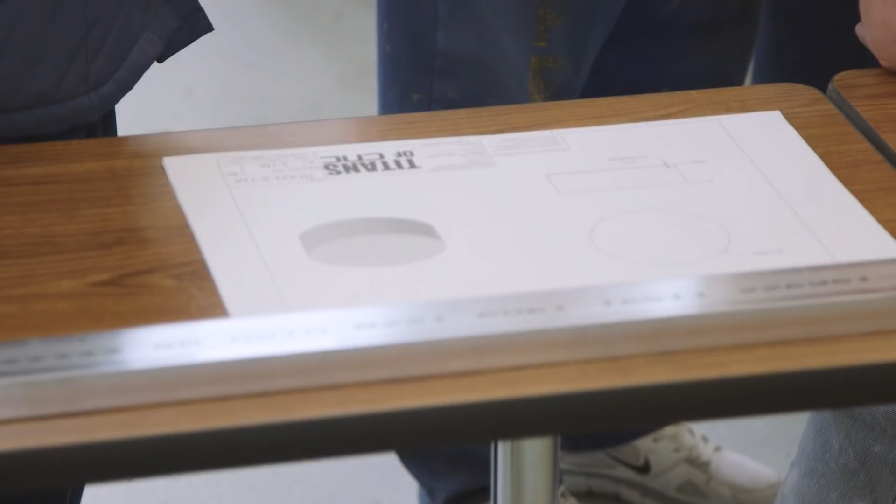When I think about training you guys and manufacturing, I want to make you valuable. This is the first series, it's 10 parts, and it's all online for free. It's a mill series where we have 10 different parts. We start off with a simple shape, a nice rectangle, and as you go through the 10 parts, each one gets a little bit more complicated. We use the same basic tools and keep adding just a little bit more, until you reach the 10th and final part, which is an actual aerospace part, just like the parts we machine in my facility every day.

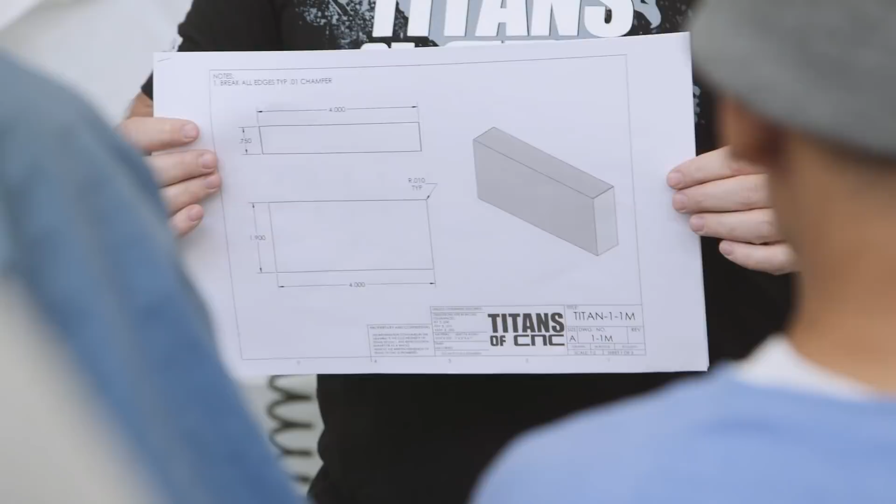We're calling these building blocks. On the video, I actually teach you exactly what to do. All you have to do is listen to me and do what I tell you in the video, and you will make this part. I noticed a lot of teachers were only doing a few projects, and I believe nobody can become an expert just doing something a few times. It has to be repetitive.

It's just a rectangle, it's not too intimidating, right? Once you learn how to do this rectangle, then this rectangle with some chamfers on the corners is just a little bit more, but there's a progression.

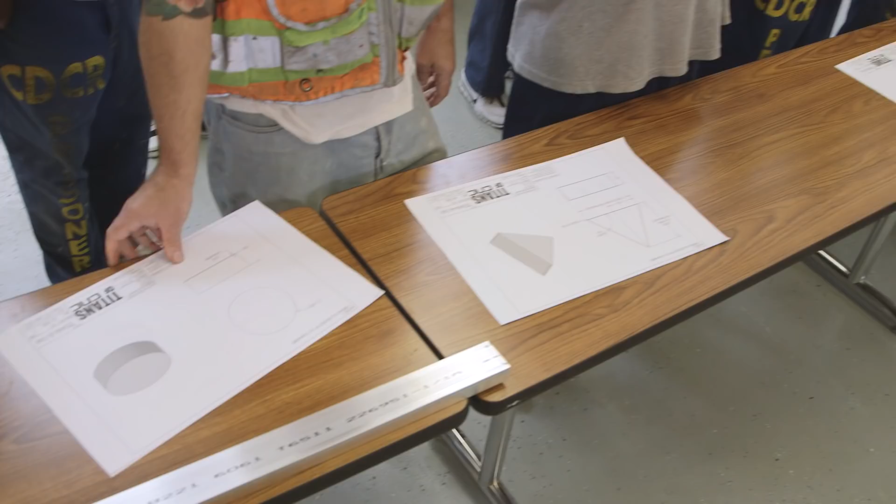What we have to understand is a lot of teachers got funding and got a machine, but didn't have the money and resources to actually buy material and the right tools. So material would be donated and they'd try to build something around that, which is why they'd only have a few parts. Every single part here, all 10 parts, vary in complexity, but I've standardized the material. Every single part—triangle, circle, square, rectangle—can be made from this one bar right here. You buy one bar, you can make all the parts from one bar.

Now we have the foundation. Let's put some threads in it. You have instruction sheets with all the prints that come with it. We section the drawings out so you can see the different stages in the part, and I explain exactly how to drill those holes. Then we come over here and draw this pocket and this cutout.

One of the biggest problems in manufacturing education is we're taking kids, putting them on manual machines, and they're getting experience in a manual setting at a certain pace. We need to flip that on its head. Kids today aren't growing up with the same toys we did 20, 30, 40 years ago. They're taking in technology at incredible rates, and technology is at a huge level.

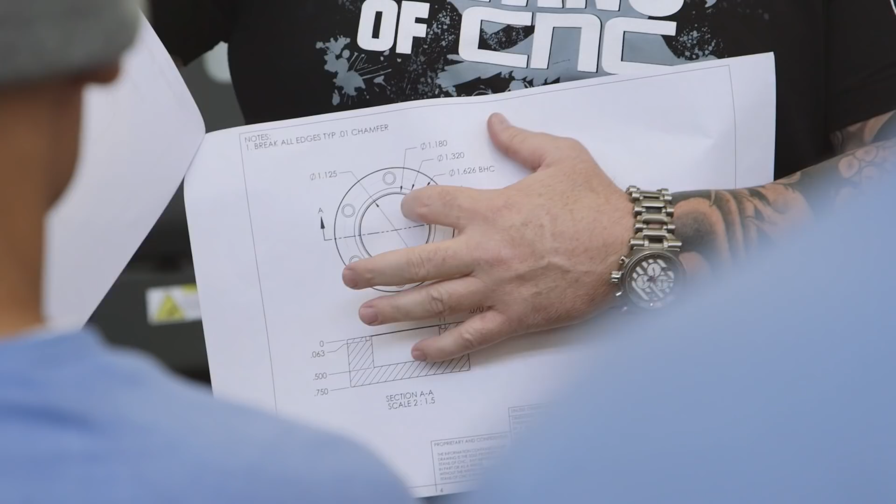I don't need the students to understand the whole industry. So my curriculum is going to teach these guys how to design their own parts on day one. Each one, as you go through, has a new challenge to it. On day two, we're going to teach them how to program that part. By the time you do part one and get to part 10, you'll know how to run these machines. Then on day three, we're going to CNC that part—not on a manual machine, but on a CNC machine.

All right, so we actually brought these computers and loaded the first teaching video, and we have the second teaching video where we actually programmed the part. So from this day on, you basically can start making parts. If I'm not here, the guys who know the most can kind of lead the other guys, and you guys can start working on your drawing and your different things, all right?

The first thing we're going to do is actually draw this part right here, okay? A lot of machinists don't get to learn how to draw parts, so what you guys are doing right now from day one is like upper level stuff, okay? So I'm going to play this up here, then you're going to understand the road that we're traveling on. You guys get me? Everybody understand? You good? Let's go, okay, go.

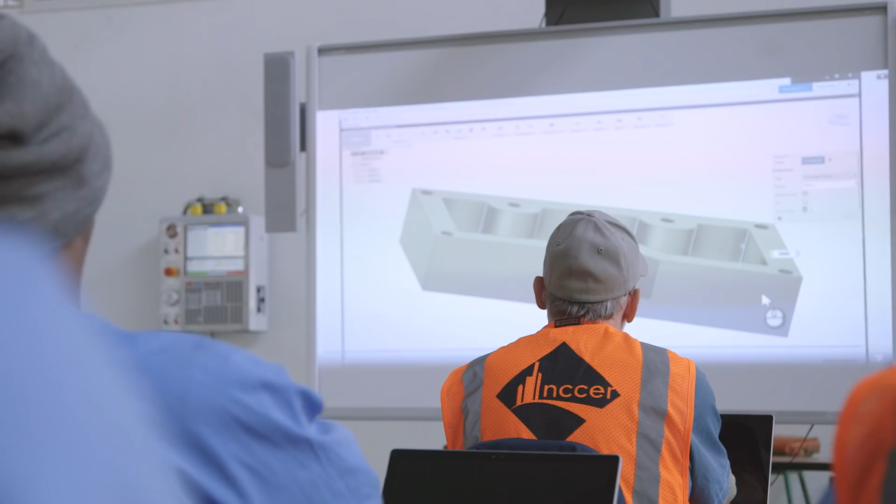Each of the guys have that video on their computers. They can open their computers, bring up Fusion, and follow the video step by step to learn how to draw. When I go back to my shop tomorrow and I'm working, they're going to be able to stay right here, learning off the video, getting better. I'm going to go to this one, go to this one, come down to this one, and flip it around just a little bit.

I'm going to place 0.195, enter, and there you go, guys. We have the solid model, the Titan-1-1M, and guess what time it is right now? It's programming time.

Boom! You guys kind of get it now? You saw it. Now you guys just have to go through the motions, right? But we're gonna draw the whole thing right out of the gate. I'm gonna have you guys working on drawing, and then you're just gonna go from the video to your CAD/CAM system, the Fusion. And if you don't know what I did, go back and watch it, and then just duplicate what I did. I'm gonna be working on the machine over here, getting ready to actually cut this part. So go ahead and start drawing.

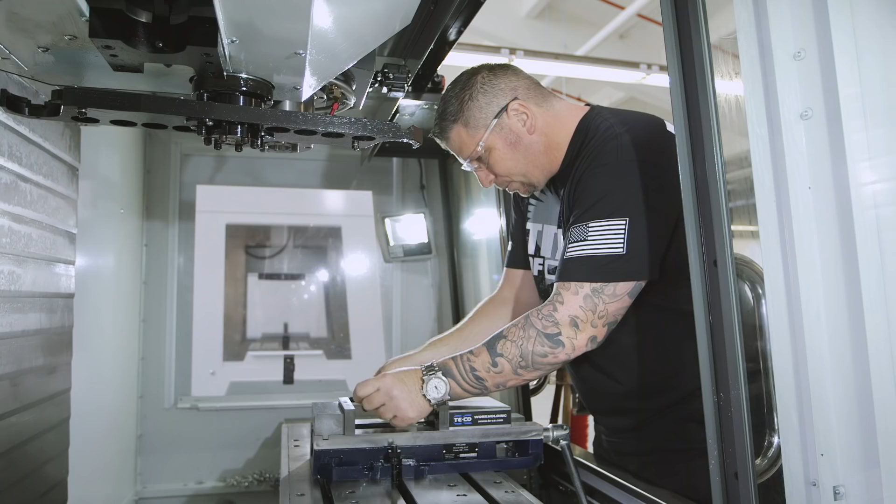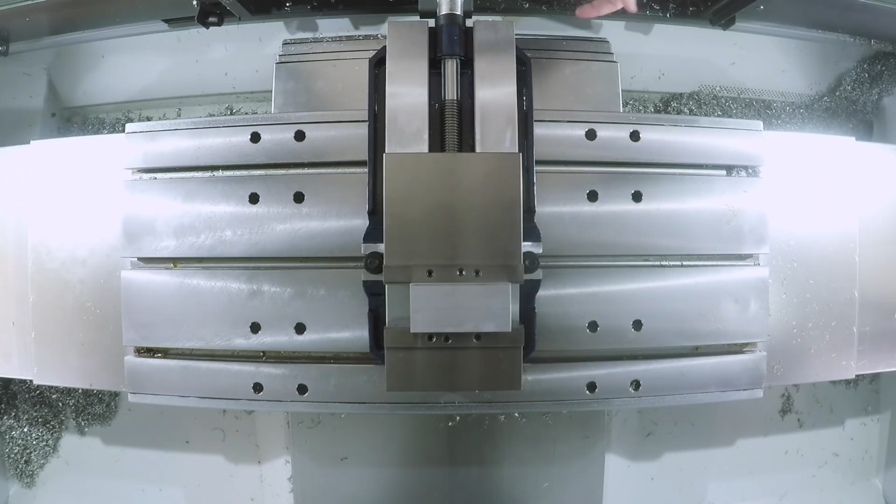Now that all the wiring is done, and I actually have one machine ready to go, I'm just going to show the guys how the machine runs. I made a program to machine the Titan-1-1M project from the Building Blocks series, just to show them how the machine works, show them the mechanics of the machine, so they can start wrapping their heads around it.

I was expecting a little more mathematical explanation, but the software does it all for us. You just click in radiuses and type in what you want and it's all there. I think this Fusion software is going to streamline everything.

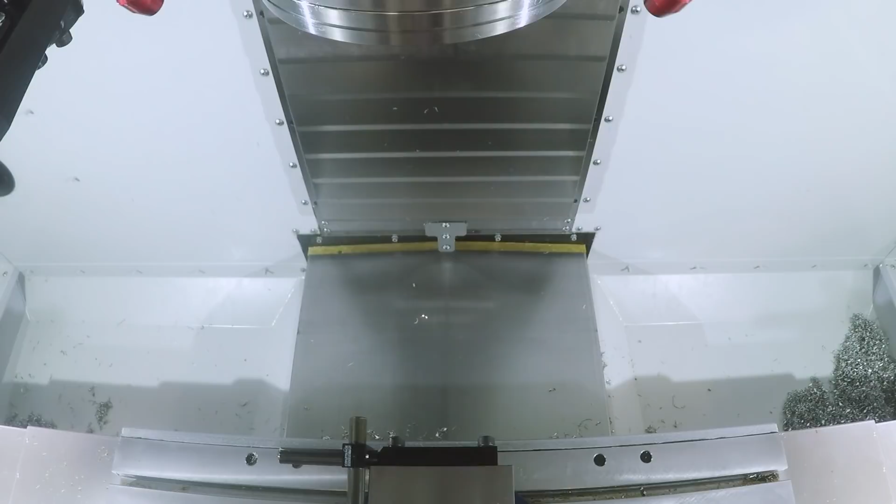The way he explained it on the video, it's super easy. It's a lot easier than having to go through a book and just guess, or listen to a teacher explain it in person, because there was no time wasted, so I think we could catch on fast. Really excited I'm going to make this part, it's cool, finally getting to the bread and the butter.

It's pretty easy to follow how things are highlighted. If you're doing like the depth of a hole, you can see a silhouette through the actual wall of the part. You actually know what you're clicking on.

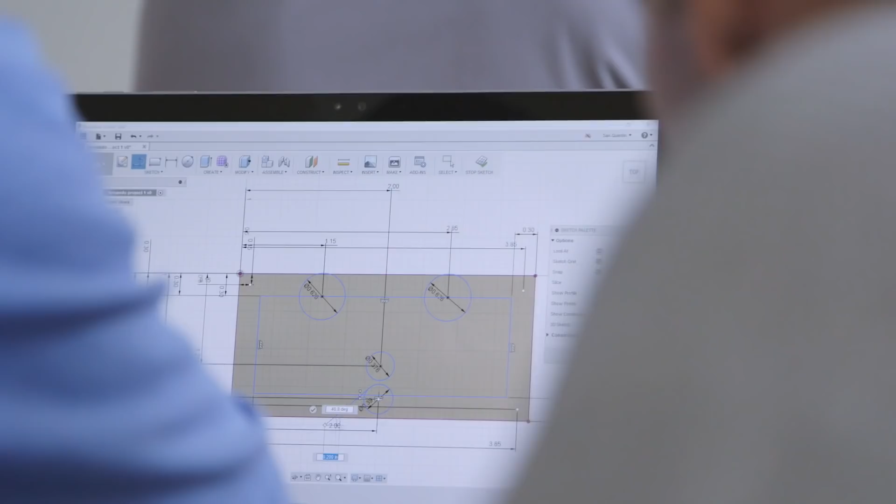First time sitting in front of a computer with some technology in it, it just blew my head out. I think it's pretty good, pretty good.

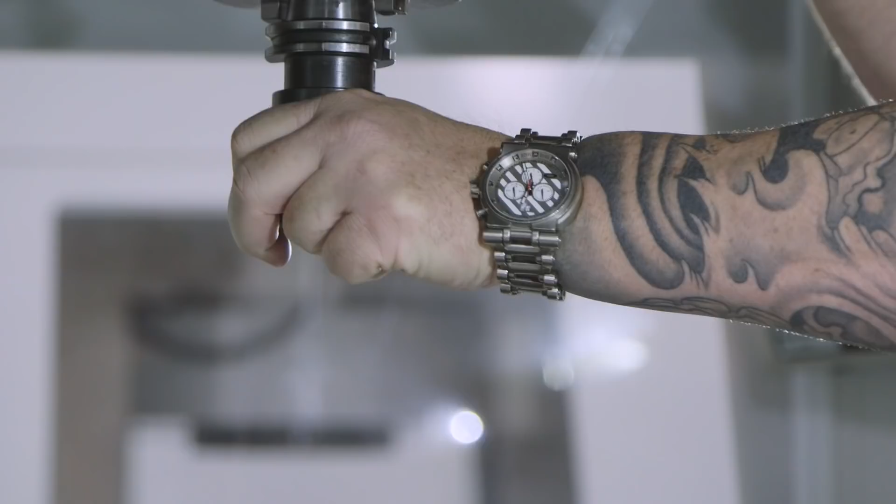It lets us know that we can get out and there's opportunities for us, we can succeed. We don't have to keep living in this repeated cycle. We can break out of it and create new paths to go on.

It looks really modern. I don't know much about computers, but I like the look of it.

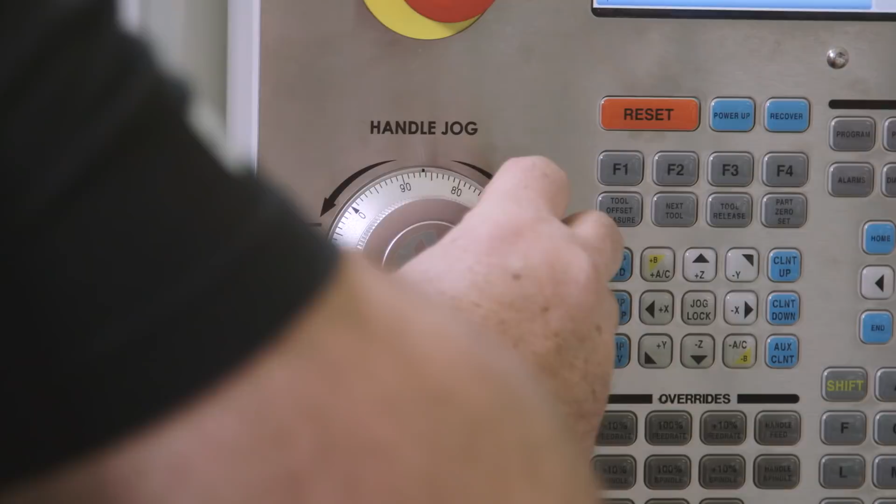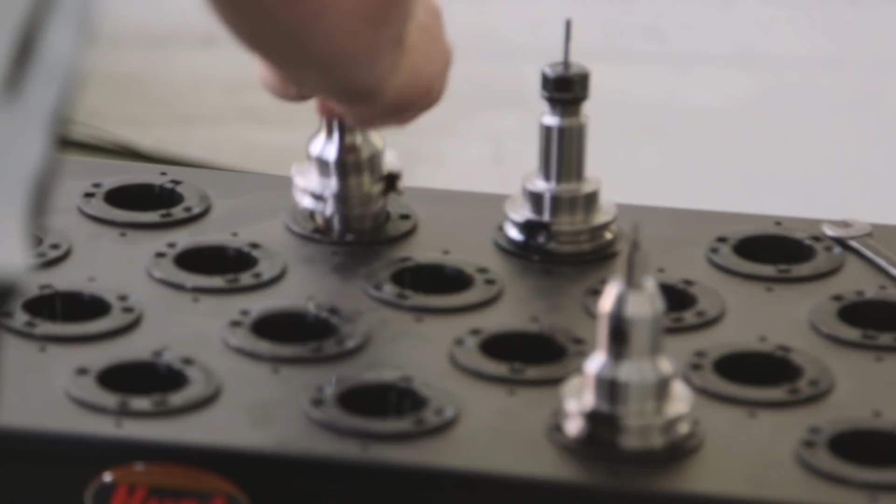I think it sheds the isolation that I feel, knowing that if I'm learning something, somebody else trying to enter this job market with these skills is trying to learn right now as well, whether he's a youngster in college or somebody looking for a second career, we're on the same page.

It gives individuals a lot of hope, knowing that just because you've made mistakes in your past, you're not counted out, you're not just disregarded. This program is like a second chance for a lot of good reasons. Being able to make parts, give back to your community, provide for your family, but most of all, it gives me a lot of confidence. And confidence to me is the key to success and moving forward in life.

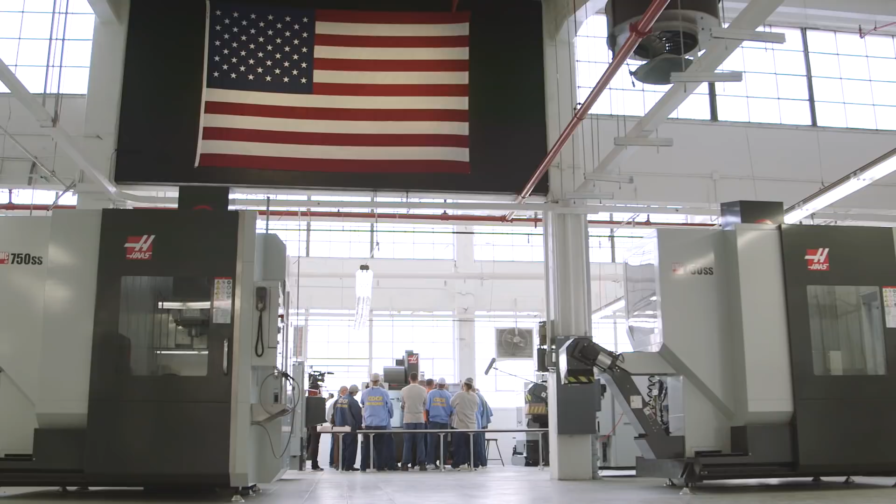Ready? Just a little rapid, rapid, giddy up, yeah.

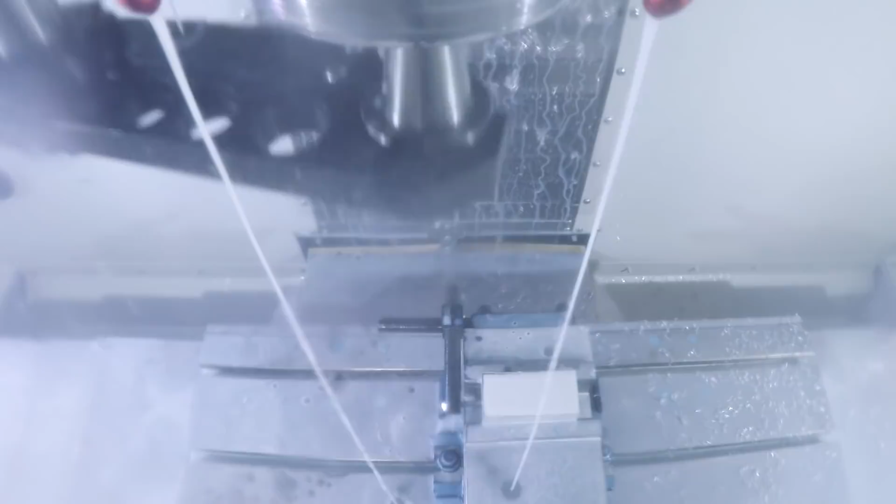Actually seeing the machine work for the very first time, I thought it was awesome. Just seeing the coolant, the chips flying off the piece, the tool change. I was quite excited, actually. You know what I'm saying? I want to see more.

Add a tool change. Add a tool change. Add a tool change. Yeah.

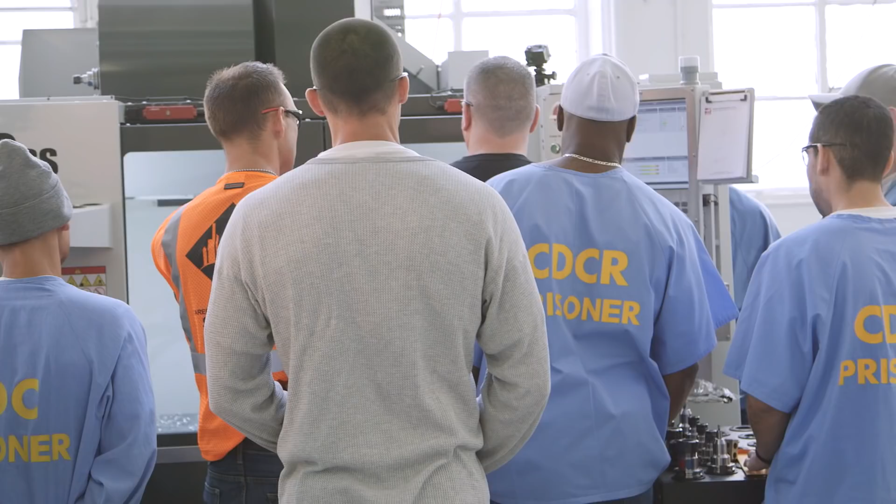It seems like a good group of guys, a good positive influence. It seems like everyone's taking it serious, and the energy and the constructive criticism that Titan provides. I am just 100% excited, and I just can't wait to do it.

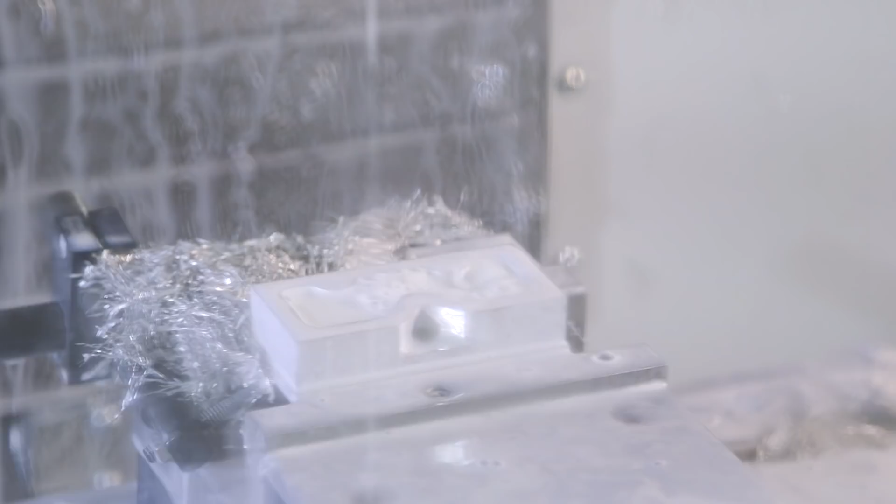What I saw today was really exciting to me because what Titan was demonstrating was that these inmates going through this program are going to advance really fast, they're going to become really qualified, and they're going to be able to go out and get a job.

A lot of these inmates in here, they think it's a joke just because of the cameras, they kind of hate on it because they're so institutionalized and they don't want to see people do good. It's sad, and so I just hope that all these vocational programs could bring more people out, so once we get out, we give back and make the world a better place.

I'm able to walk in here and bring something new, bring a curriculum that these guys are going to get, and that's going to change their lives.

I got kicked out of school. My principal in high school told me I should drop out because I would never graduate. He told me I was on the wrong path, and I did go to prison. But I got out, I stepped into manufacturing, something clicked. I'm not a banker, I'm not a doctor, I'm not a lawyer. I didn't do good with book work, but I can machine anything on these CNC machines.

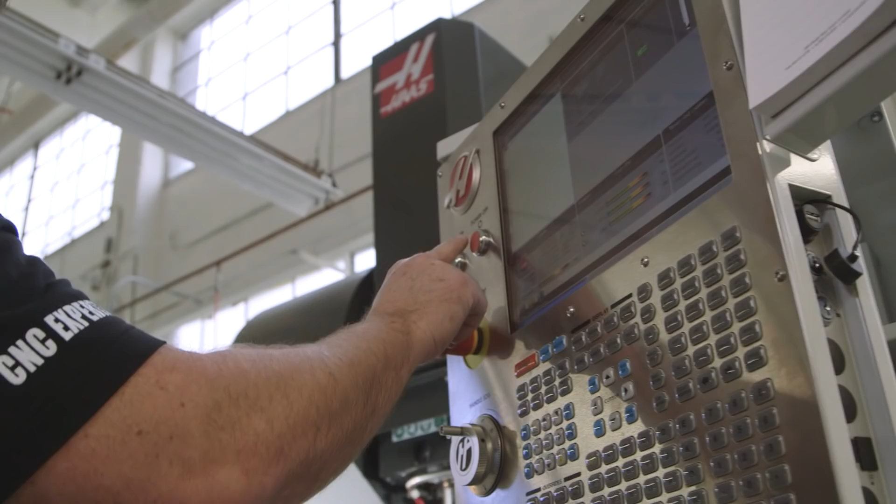It's just an incredible journey. A year ago, we came in, I talked to the inmates, we set a vision, we set a plan, but now I'm introducing the curriculum, the exact projects, putting the videos in place that they can actually watch that will teach them how to make these parts.

We need that consistent workflow. These guys need to be learning every single day. CNC machining right here at San Quentin Prison, boom.

How's these tables? They look perfect. How you guys doing, man? Yeah, how you doing? Yeah, they look nice, they're actually solid, they bolt right to the floor, they level. These are awesome. And then they did the other size for you?

We needed tables, not just high tables that were going to be by the CNC machines, but we also needed lower tables where the students could sit down and actually work on their CAD/CAM system. Let's bring these in, I'll show you exactly where to put them, all right?

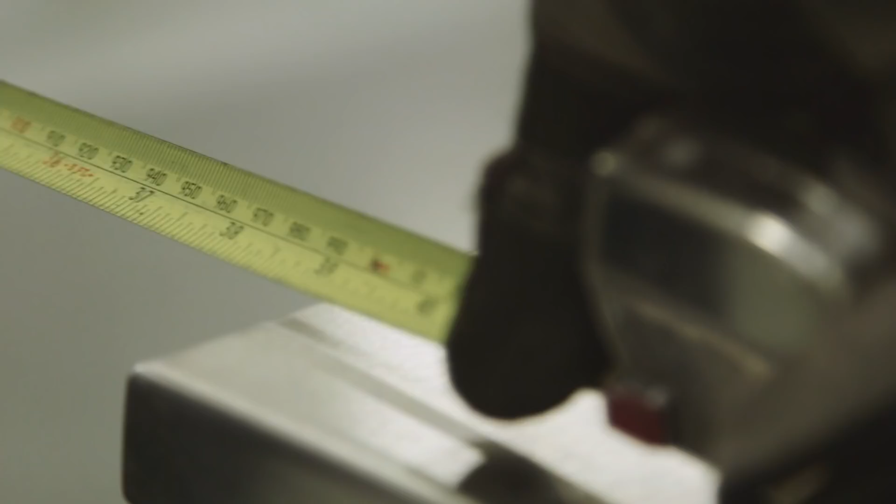We got some rags and some spray, we'll wipe them off, cool man, get all that dust off. Yeah, right about there. I like that. Put like 3 right there. James, you can put that right in front of the 750 right there.

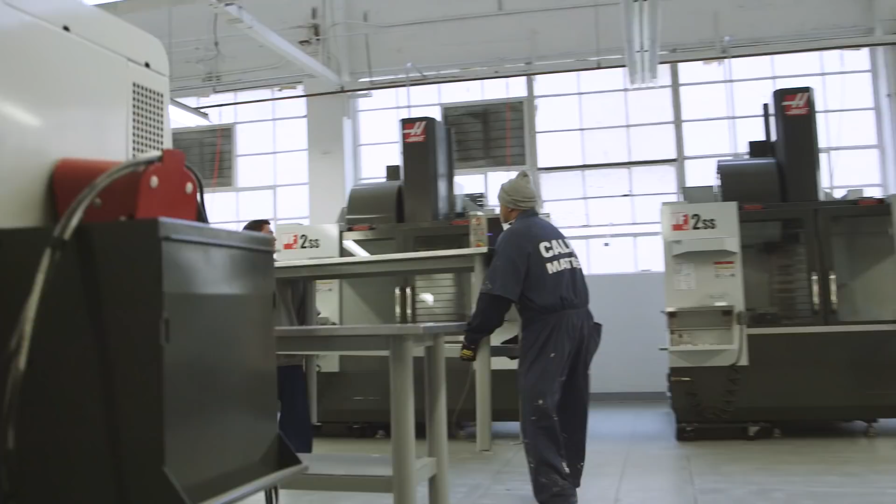So we're gonna have a few by the manual machines, we're gonna have 2 over here by these 5-axis, and any tables left go into the inspection room. Hey, where's my tape measure? Hey, Bird.

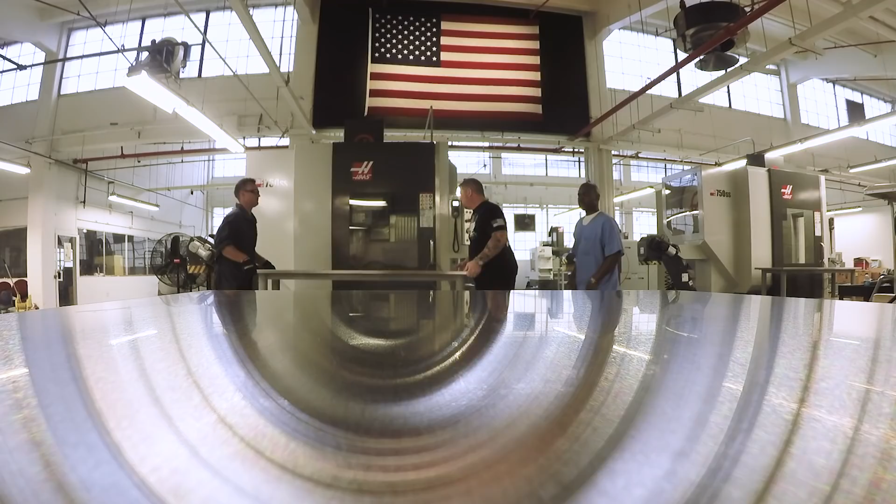I've told you guys plenty of times, man, you can be good for 200 days, but the one time you mess up, you're out of the program. This is your ticket to getting a job that pays rent. When you're outside there and something's coming against you and you have a choice, you got to make the right choice, and that's for your family and for your future, you know what I mean?

I'm here where I am because I made the right choices. Eventually, I started making the right choices. So I'm just saying, keep your heads on straight because one mistake can set you on the wrong course. I put my heart into this program, and today, all of a sudden, I find out that a guy I consider a friend, he is gone, he is out of the program, and there's nothing I can do, there's nothing he can do. It is finished.

I'm qualified. I'm qualified to speak to the youth. I'm qualified, literally, to talk to these people that are going through the phases of being bullied and want to do something negative that's going to put them in juvenile hall. If having one guy kicked out of my program wasn't bad enough, now I have 2 guys kicked out.

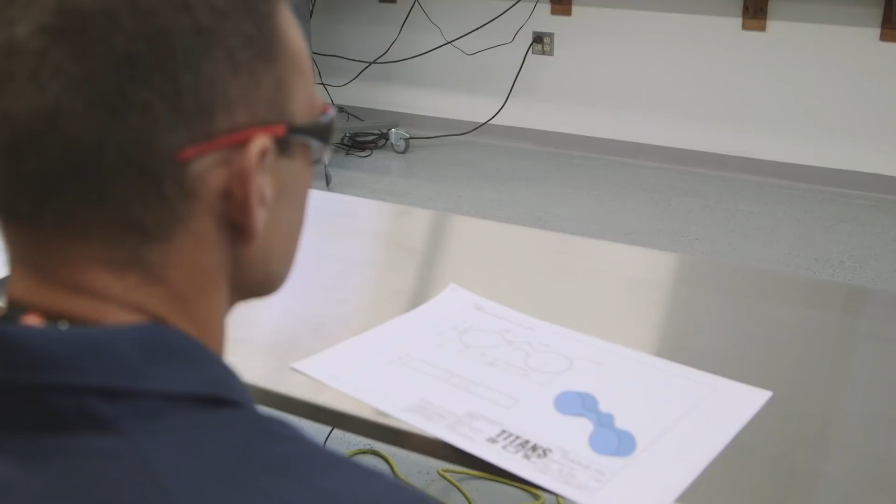I'm doing college. I just came up with an idea to do a binocular because there was a cool shape, and one of the reasons for doing a cool shape was how do you hold it when you flip it over?

These men behind me, they're qualified because they've been through the crap. They know the mindset of, hey, wait a minute, you're going out to do something not just stupid, but that can change your life and the person's life that you're going to do something to, and you don't have to do that.

So on this one, you have to take the outside sketch and profile, create a pocket, and cut that into jaws that actually hold the part.

I'm gonna have you guys watch the video, and then we're gonna go through and actually draw the part, okay? That way I can show my family, my wife, my in-laws that prison does help sometimes. It's just on you whether you choose to change or not. If you want to do all this negative stuff, then you want to pave that path, continue with your old ways instead of becoming a new person.

I understand the difference between being in darkness and being in the light. Having complete negativity and no hope, versus having complete hope and vision for the future. I am somebody who understands that he has a beautiful family, a company, responsibilities.

So every day when I wake up, I make decisions based on that. So I'm gonna work with these students and make sure that they understand that they could be out also. They have to make the right decisions, and they have to have consistency so they can learn this trade, get out, and change their lives, never to come back.

What does that say? 1.6. Okay, so that's wrong. So put 1.9. 1. Yep. Point.

I've been in prison going on 33 years now. Been to Folsom, Pelican Bay, Corcoran, CMC, Lancaster, and then I came to San Quentin.

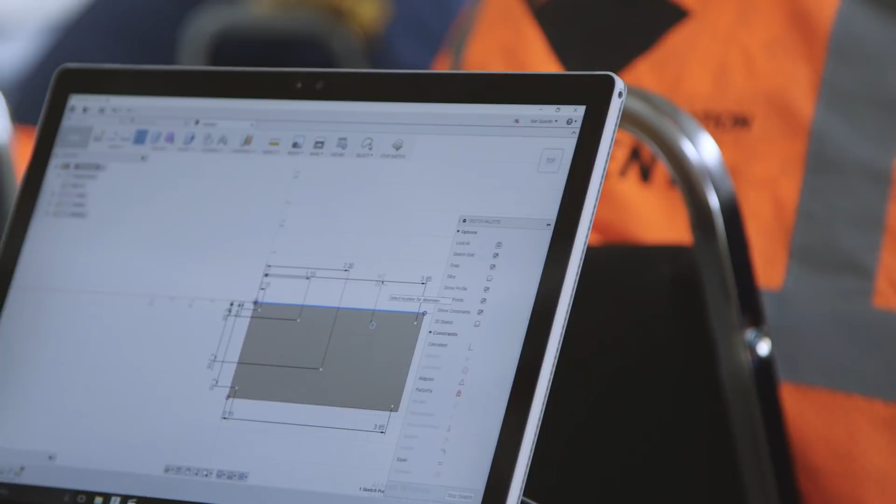And then I can touch the screen and do stuff on it. I didn't know that, because all the time I'm trying to work it on the button or with the mouse. But then the guy came over and just touched the screen and made it do something, like how'd that happen? He said, yeah, you can just move it on the screen. I'm looking at this stuff because the arcades I went to when I was young, all they had was the little rifle where you shooting at in Pac-Man.

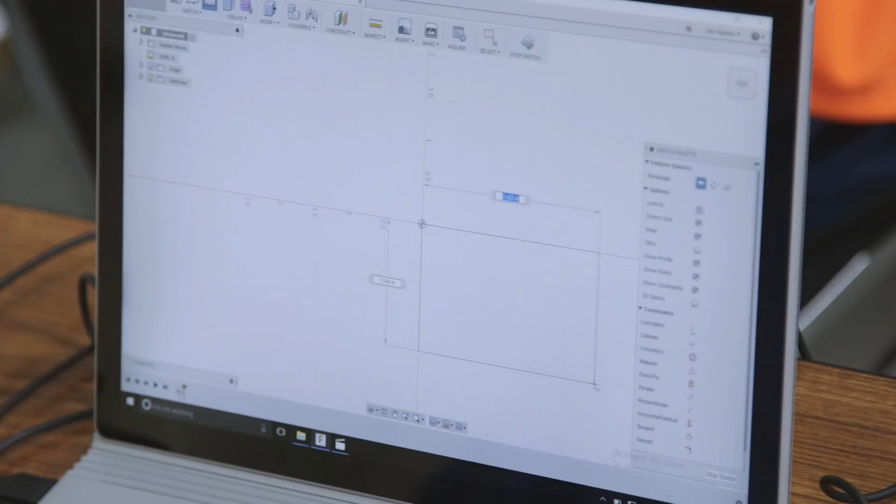I was like a little kid. When I got up from the table, my legs was numb because I was sitting there stuck on this thing, looking at all these gadgets and watching how this thing move around. I'm like, man, that's crazy. I know I'm gonna get me one whenever I get out. I'm gonna get me a laptop, cause they say you can do anything on them, right?

1. Yep. Point. And then enter in there.

Titan is a dude that this guy you just want to be friends with. His attitude, his personality was something that drew me to him. Me, I never really talked to white boys before I came to this prison. When I did talk to him, it was always about something negative. So when I started engaging with him, he was like, put his arms around me, shook hands and all that. It was like, man, this is a dude from the outside. He accepted me like that. So I definitely want to be around this kind of guy right here.

I did the D, I did it with the D, and I'm still trying to get that.

We need this. There's a lot of guys that go out and they don't fall into a good job because they didn't have nothing to take out there with them. You learn this here CNC program, and you got the knowledge, people care about what you know. It won't be talking about my past, be talking about my future.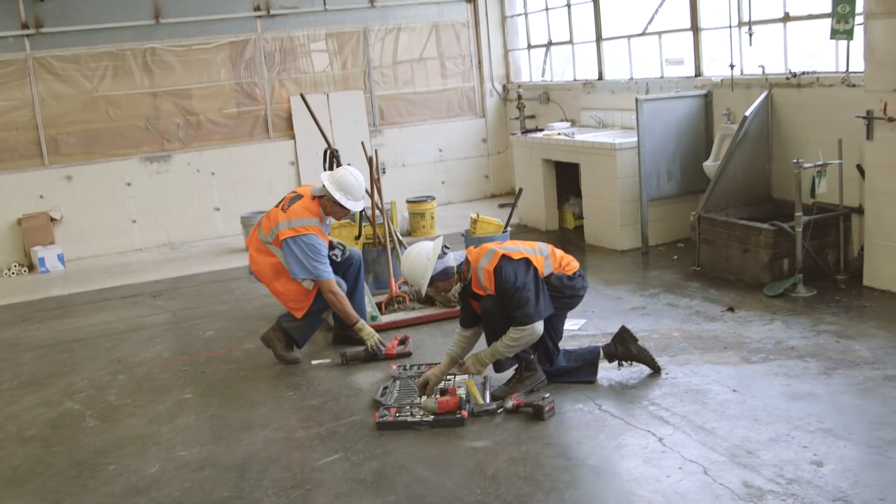You get the shots of the old, dirty machine shop, and the whole transformation, and you get this bright, white, everything's new, and it's kind of symbolic of the prisoner's transformation of the old into the new. I like that, how that whole thing just ties together. It's an inspiration, I think, for me and for everybody else. Just knowing that you can go from one thing, and it's not impossible to completely do a 180 and change my life.

You know, I don't look at it as like, oh, I'm just building a shop. It's about perspective, you know what I mean? If you have no hope, you're gonna walk around like you have no hope. But as soon as those walls go down and that box becomes bigger and now you have more opportunity, you're gonna react like you have more opportunity, you know what I mean?

Knowing that I'm in prison for murder, I took somebody away, a special person away from people, knowing how for the rest of their lives they're gonna be in pain, despair.

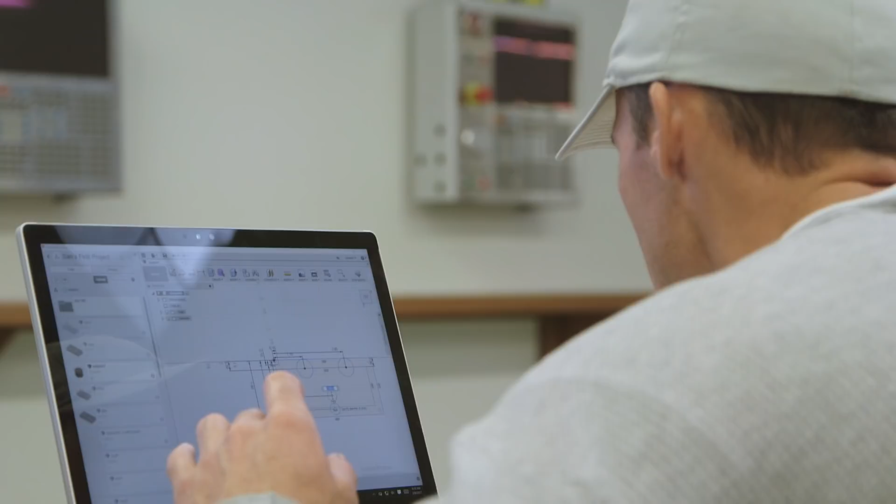Living amends. That's how I'm dedicated to living my life. Trying to make decisions based on my desire to enrich other people's lives rather than hurt them. So that's my philosophy, that's how I'm changing, and that's how I have changed, and that's how I'm going to continue to live the rest of my life.

I would rather keep that in like the boardroom setting. I don't want to put that out on camera in any way. If I get a chance to speak to them, I want it to be just in a room with no cameras around, if that's all right.

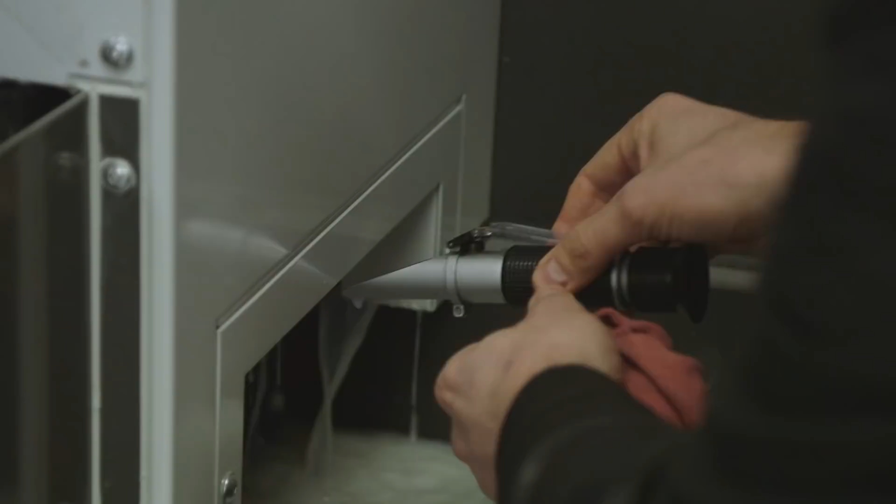When the oil droplets are very microscopic, less than 1 micron in size.

These people are going to be getting out of here, and we want them to be contributors to society. They want to be able to do that and take care of themselves with a real job, making real wages, providing for themselves. This is the start of big things to come.

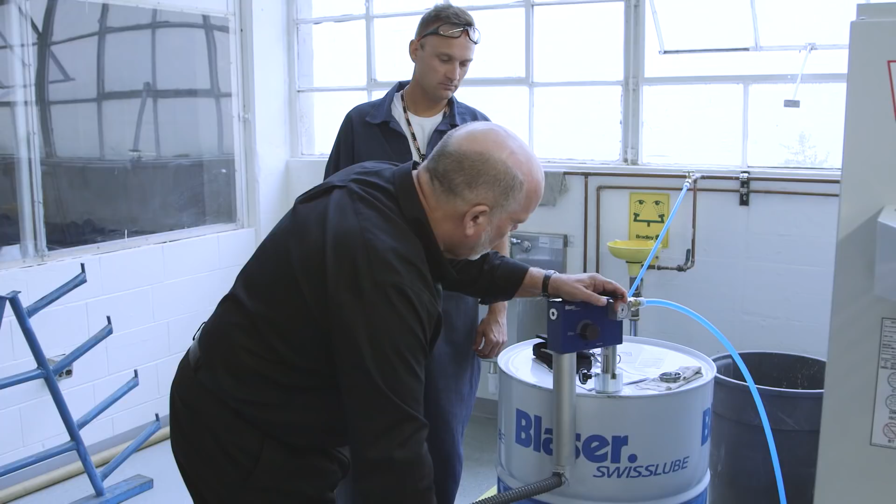If we can help another person correct the wrongs that they've done, the world is a much better place. I have my own predisposed opinions about individuals like that, up till today. Like, you know, he's a danger to society. I used to think we just need to build bigger prisons, and I've actually changed my mind today just because of having a conversation with one individual. And that's been pretty emotional for me.

On the next, Built Behind Bars.

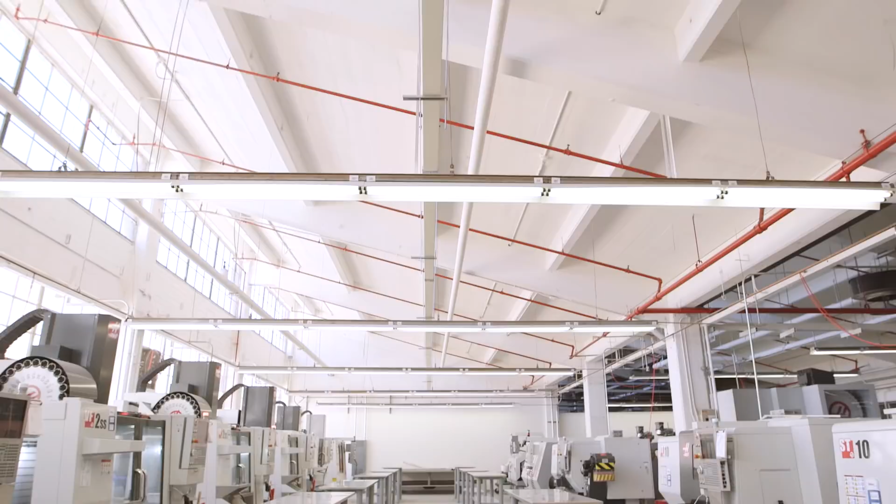Looking around this shop, we are finally here. I've never been inside a prison before. It was kind of life-changing coming and meeting all these guys. Being able to contribute to something greater than myself, it's gratifying. That right there shows me that I can be a machinist. This thing that Titan is doing, it helps me get home, gives me a trade at the same time, and helps me better my life.